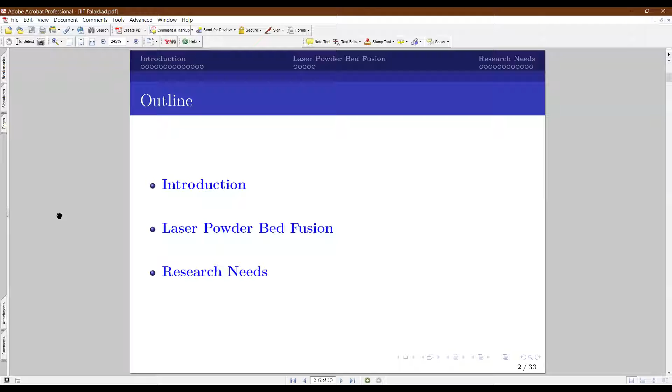In this presentation, I want to cover what is a commercially successful additive manufacturing process, that is laser powder bed fusion, how in the certification process we expect manufacturers to capture parameters, and what are the avenues for research for academicians. As a certification agency or development agency, we look for academicians to contribute in this area, either through PhD research or funding proposals, so that the data generated helps us establish this technology into several aerospace applications.

I think this is the last session. You've had a lot of technical sessions on metal additive manufacturing from different experts, and they've given great insight into the process, so I won't go deeper into that. I'll just slightly touch upon some important points in metal additive manufacturing, then directly cover the applications targeted in aerospace.

As we all know, the CAD drawing is the input to the 3D printing machine, which helps build the 3D printed part by progressively adding material layer by layer. A variety of energy sources are used: laser, electron beam, electric arc, of which laser and electron beam based machines are very popular. Particularly in the Indian additive manufacturing market, laser-based machines are more popular than electron beam machines. These high-energy laser sources are used to locally melt the metal powder in a protective atmosphere, otherwise it will lead to oxidation and other problems.

Along the path guided by your CAD model, you melt the metal and rapidly solidify it, repeating this step by building layer upon layer to evolve the three-dimensional component. Broadly, ASTM classifies this process into two categories: powder bed fusion, where powder is the raw material spread on the bed using a laser or electron beam to build the component, and another one is direct energy deposition, which uses slightly higher energy, using either wire or powder as feedstock.

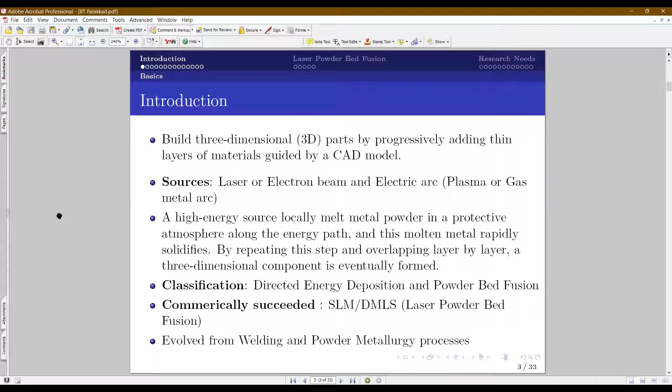Let's have some idea about what are airframes in a typical aircraft and helicopters, and what components we can target in 3D printing. So a typical aircraft airframe, we generally classify the structure into wing, fuselage, horizontal and vertical stabilizer, and landing gear.

Coming to the helicopter or chopper, we have a fuselage, and we call the backside the tail rotor system, and you have skid landing or wheel landing, and primary rotor systems.

If you look at the main rotor blade in the helicopter, it's made up of titanium with composites, and most of the bodies in the airframes are carbon fiber reinforced plastic or carbon glass fiber reinforced plastic. But the location wherever high critical stresses occur, and where loading or fatigue and tensile forces are high, metallic components are generally used, preferably aluminium.

Very rarely is magnesium used. Magnesium is widely used in the helicopter where vibration is high. Otherwise aluminium is more preferred because of the process complexity in manufacturing magnesium. Either the forming route is difficult, and the casting route also has its own challenge, like fire hazard. So aluminium rules the metal area in a typical airframe.

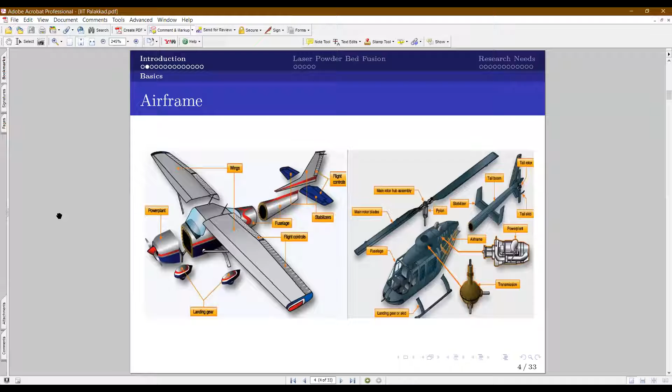Most elements inside the wing or fuselage have a lot of channels and structural elements. Those flanges, casings, all those things are the most potential components that can be 3D printed in coming days. Currently these are manufactured through some forming processes or directly machined from the feedstock.

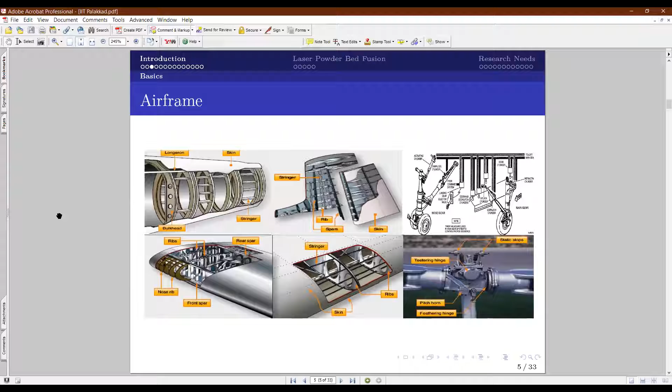Looking at the temperature and pressure inside a typical aero engine, when air enters maybe sub-zero temperature in the fan region, it's close to 100 degrees. Then when it enters the compressor, it will be in the order of 400 - with different stages of compressor, there's a progressive increase in temperature. In the combustion chamber, the temperature goes about 1500 to 2000, and the turbine entry temperature will be on the order of 1200. Then it goes out as exhaust.

So different operating conditions prevail in a typical engine. That's the reason the fan is generally made out of aluminum alloys, and the rear end of the fans is usually titanium, mainly titanium 6 aluminum 4 vanadium.

Then comes the compressor. From the first stage to close to the last stage, you typically find titanium alloys, either titanium 6 aluminum 4 vanadium or titanium 6-2-4-2. Both are alpha-beta alloys. And the rear end of the compressor, you will find some super alloys.

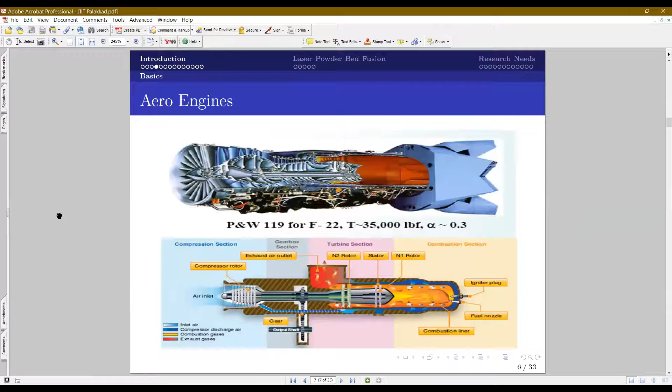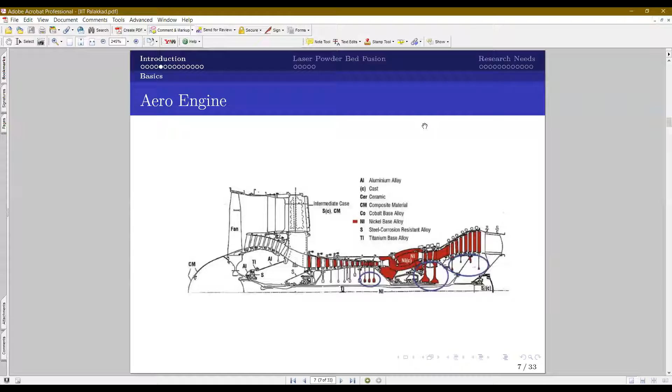So we will just look at some of the potential components which are very promising through 3D printing. Nozzle guide vane, it's a static part which has complex cooling channels and complex designs. The thickness is also very less. And this is a static part, and turbine blades are rotating parts. Again, you have cooling channels, and some of the turbine blades are single crystals or columnar grain structures. These columnar grain structures are easily attempted through 3D printing.

There are some studies from the US wherein they show that single crystal also is possible through 3D printing. Similarly, the turbine disc, a massive component with the integrated blades and disc, called blisk. So these components and the combustion chamber and fuel injection nozzle used in the combustion chamber, all of them have high shape complexity, and the requirements in terms of NDT or in terms of property requirements are very high, which can be easily realized through 3D printing.

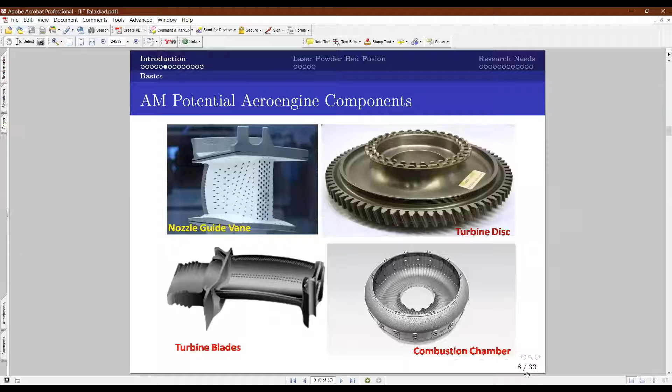And coming to the gear transmission components in the aerospace, especially a typical aircraft, you see that aircraft mounted accessory gearbox, which consists of about 10 to 15 oil lines running from one end to other end, about half-meter length.

Oil lines are running. Some of the oil lines are buried inside, like a blind oil path will be there. So these are presently manufactured through sand casting route because of the massive size and complexity. The yield is 15%, acceptance rate is very poor. That is, even with 10 components, if you make only one component that passes, it fails at some of the regions. One is either the dimension issue comes, or the oil passage issues, or defects at the oil passage junction. So these are the major reasons for the rejection of these gearbox casings.

Similarly, helicopter gearbox, which is also very complex shape, and wheel hub. So these components can be manufactured through 3D printing instead of the traditional process to reap the benefit of 3D printing.

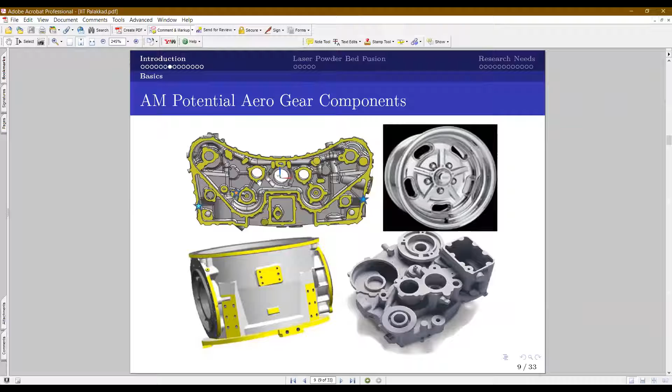And some of the sheet metal components, if you see, several components are assembled together and joined through secondary process like welding or brazing. So these components can easily be developed through 3D printing as an integral single component.

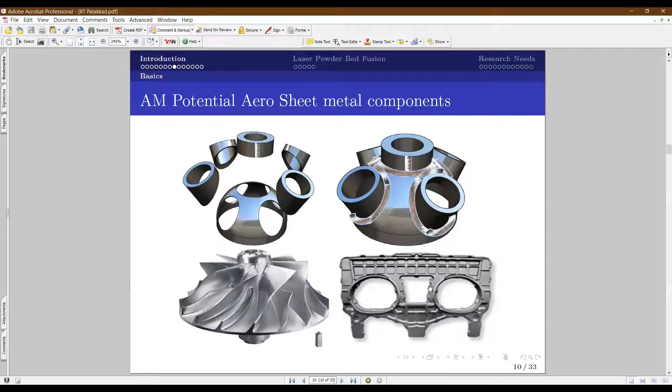And some of the components in the aircraft like impeller, which are directly machined from the bar stock due to the complexity of the shape. If you take these cases, 100 kg metal bar stock is taken and machined to get this impeller, which is 5 kg. So you can see 95 kg of material is wasted.

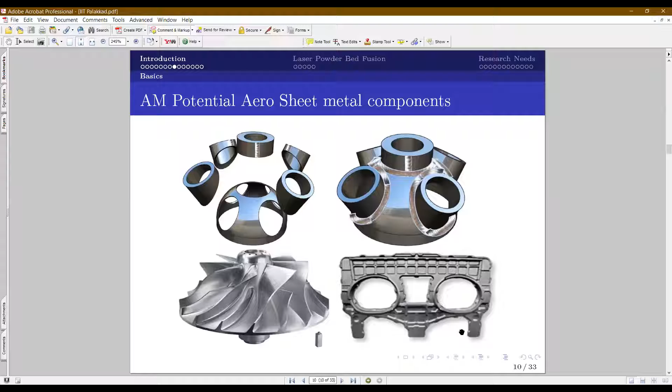So such a poor yield process can be replaced with 3D printing, as well as the complex shapes can be easily achieved through 3D printing. And the instrument panels, which are non-stress critical, and of course have a complex shape, so this can be easily made through our laser powder bed fusion kind of 3D printing process.

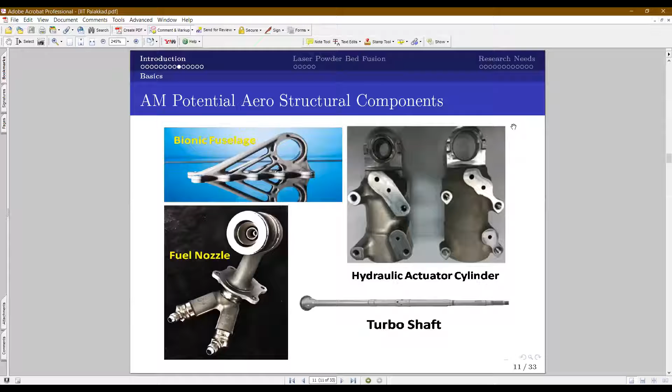And a few more: fuselage, bionic fuselage, fuel injector nozzle, which has the nozzle dimension in the order of micrometers, and some actuators, cylinders, and turbo shafts. These are the other potential components in the structural components in the aircraft, which can be fabricated through 3D printing.

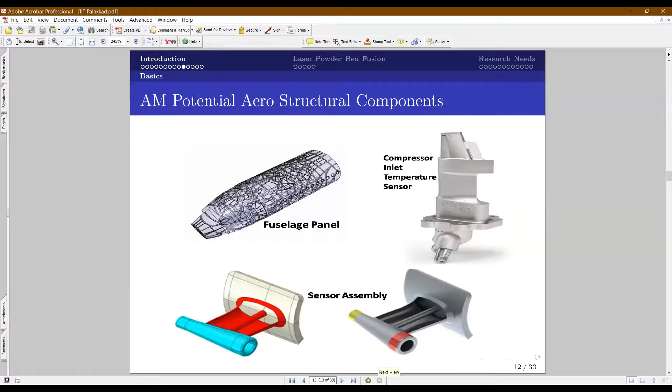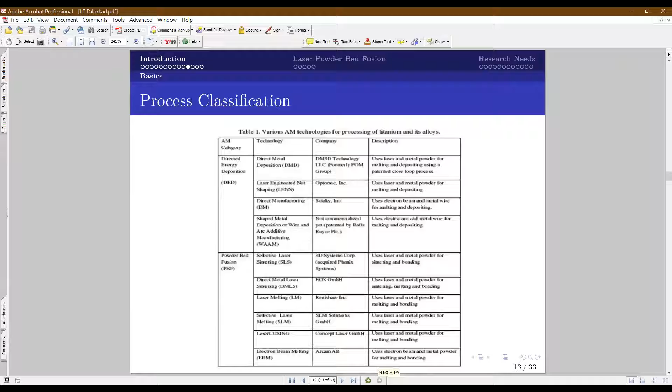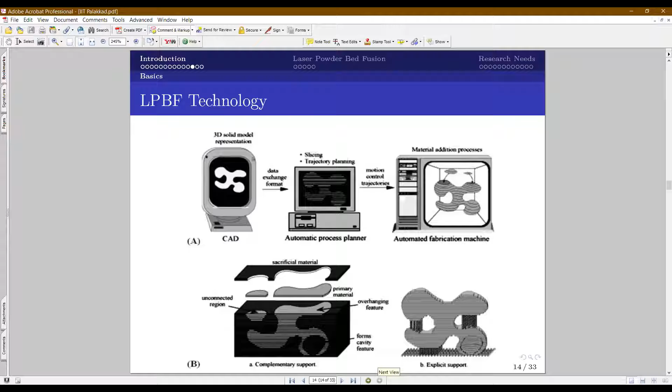You have a computer, make a CAD model, convert it to an STL file, then send it to the machine. The machine fabricates the parts depending on the part geometry. Supports are given, and supports are generally printed with weak properties so that they can be easily removed.

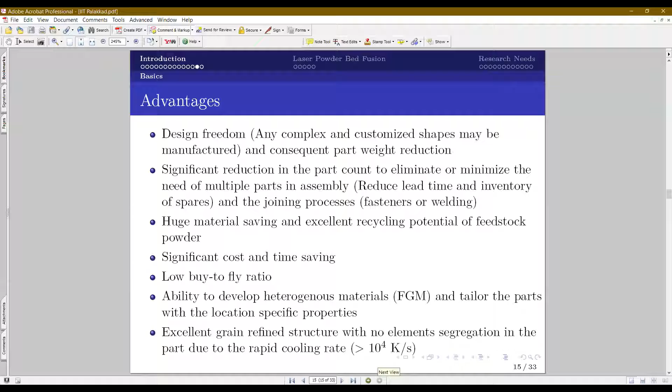Of course, any process comes with its own challenges. First and foremost challenge is anisotropy, properties varying with direction due to grain orientation. The second challenge is residual stresses because of the rapid heating and cooling. And there are unfamiliar defects, peculiar and specific to 3D printing, which are not experienced in conventional processes. So you don't have a standard or specification to help identify these defects, and there is no standardization for that.

Currently, machines cost about a few crores, 2 to 8 crores, so there is high capital investment. But the production rate or production volume given by one machine is comparatively lesser than traditional processes. Of course, this process is evolving in India, I see it picking up around 2017, and it's now in a rapid phase. It's growing, but still, if you look at material characterization, the state of material characterization is still immature.

Although it's a challenge, it is a boon for academic researchers, because they are the ones who will help develop data like microstructure and grains for different materials and new materials. For industry people, there are still challenges in standardization and specification.

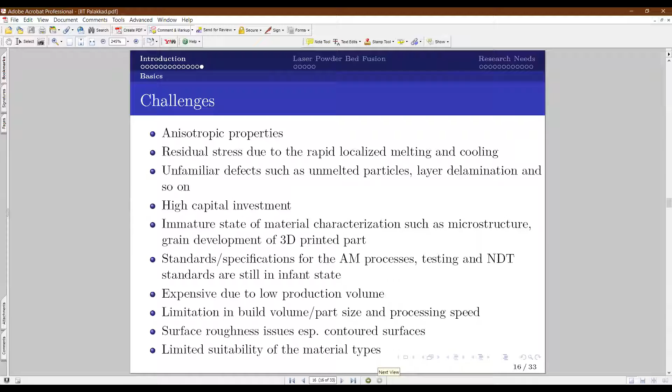Looking at it from a certification point of view, in India most of our aircraft fly with components processed by traditional methods using a different material grade. Let's say I take a beta titanium alloy, but I don't have a powder of that beta titanium alloy available to 3D print it.

So I have to map it with what I have in 3D printing. What we generally do is take a component, understand its original grade and tensile properties, and map it with the 3D printed grades. Chemistry most of the time doesn't match exactly, so we only use chemistry to confirm we're choosing a similar kind of material—titanium means titanium, aluminum means aluminum, steel means steel. For that reason only chemistry matching is needed.

Whereas tensile property plays a huge role, and I try to fit the tensile property. Most of the time we find that if strength is high, ductility is lower, or the other way around. So we try to map it and check that the variations are less than 5%. Only then do we accept it as an equivalent grade; otherwise we don't.

Next we look at three aspects of the functionality of the component: what is the load acting on it, what magnitude, and what is the temperature of exposure. What is the operating environment, especially regarding corrosion? So in the first phase, I identify a particular 3D printing equivalent grade.

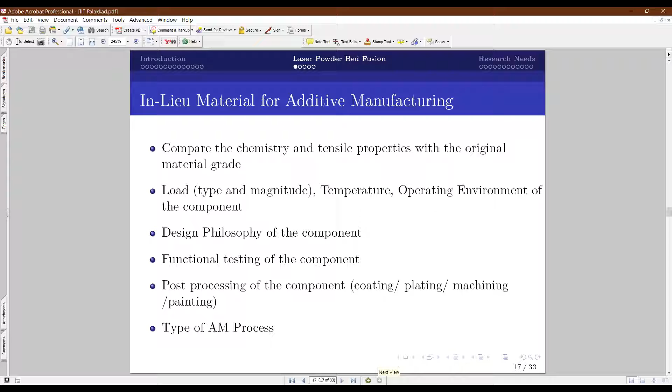Next, let's say I have frozen the 3D printing grade, like titanium 6 aluminum 4 vanadium. How do I ensure that the part is airworthy? I will start from the feedstock, that is the powder. These are the properties I will check and freeze. This is very important, because once I freeze it, I can ensure consistency in the next batches.

For example, size distribution, shape, surface texture, flow rate, apparent density, tap density, all the gaseous elements, powder chemistry with trace elements, and true density. The bracket shows what instrument is used to get these properties. We freeze each and every parameter, and unless each batch or each lot meets this frozen requirement, it is not allowed to be used to build a component.

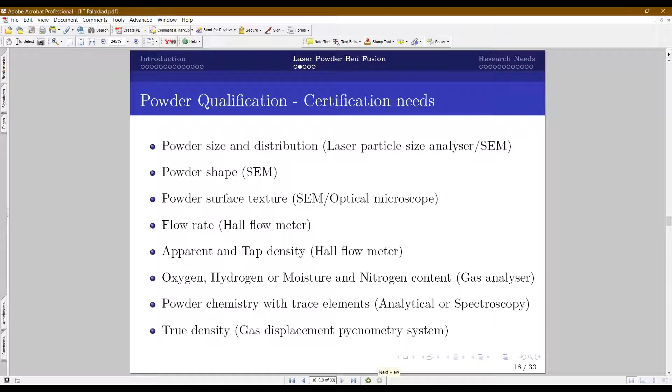Next comes the process - there are about 100 plus parameters. The major ones are: laser power, scanning speed, scanning strategy, build direction, build substrate temperature or powder temperature, layer thickness, hatch spacing, ambience used - whether nitrogen, argon or other - powder flow rate and moisture content. Then there are parameters about the recoater blades and other sensor based information.

We capture everything during the first development, and if the first development is successful, that will be frozen till the end. As long as we follow that, only then will the certification be awarded.

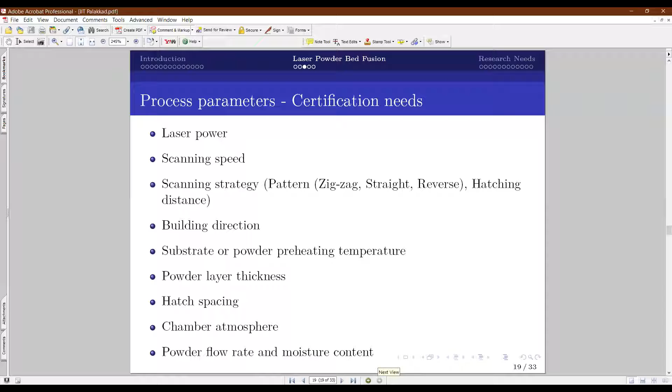Then the process document - we look at process parameter freezing, and there are other aspects too, like the process control document, which broadly covers what is the AM machine and its make. For example, if you build a component with the EOS machine, and tomorrow you switch to the SLM machine, then the entire thing will change.

Or different other processes like direct energy deposition. Similarly, the build strategy - how the build orientation is set, and the raw material source, where you buy the powder from - post processing, and during the build, whether there was any intentional stop or unintentional stop. All these things should be captured.

Then the way in which the build support structure is oriented, or the part is oriented with respect to the platform, should be captured, along with the machine serial number and build number, since different machines of the same brand or specification are used to print a part.

Then the operator who prints this material, their approval procedure, all the sensors, machines, laser system calibration status, all software and hardware updates to the machine - calibration is required if there's any change, like in the metal powder, or if it's not properly calibrated, as defined every 6 months. If they are not calibrated, they will be forced to do the calibration before being allowed to print.

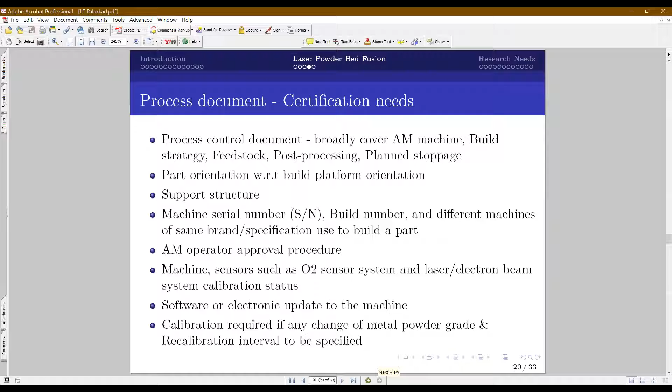Defects are the major challenge in 3D printing, and this is the area we give more emphasis to in certification. There are about 6 defects that are very prevalent in 3D printing, like porosities, hot cracking, unmelted particles, surface roughness, oxidation, and some balling.

We typically use X-ray CT scan for internal defects, eddy current testing for non-magnetic materials, fluorescent penetrant inspection, and magnetic particle inspection for surface defects.

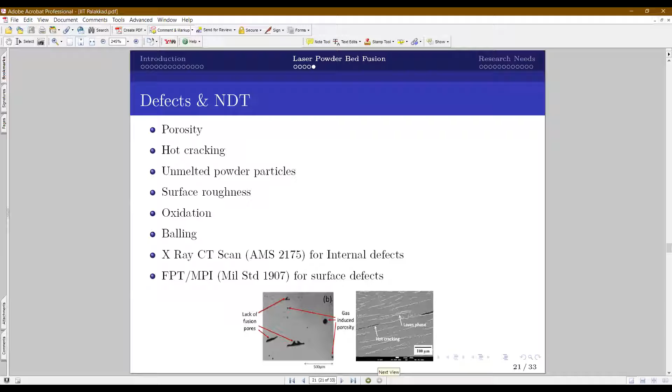So these are what I wanted to introduce. The next area is more of a discussion. I want to bring out my thought process to the academic community so that you can help us in this mission of establishing this process for our country.

I want to bring the idea of what material grades are currently available with companies, and which application or industry each is popular in.

If you look at aluminium alloys, 5 grades are very popular: aluminium 10SiMg, aluminium 12% silicon, and aluminium 7% silicon or A356. These aluminium-silicon alloys are cast alloys, easily printable, for which process parameters are already optimized.

Recently, a company called Elementum 3D has come up with an alloy called 2024 aluminium copper alloy with certain ceramic particles in it, so we can call it a metal matrix composite. RAM means reactive additive manufacturing - you have elemental particles, elemental powder with the metal, but during additive manufacturing, the reaction happens such that you find the particles forming in that.

Then there is an alloy called Scalmalloy, that is aluminium, magnesium, scandium. These are alloys for which 3D printing is easy and the process parameters are optimized.

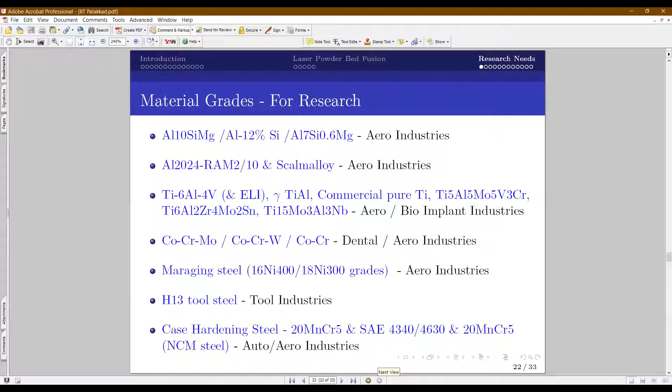In tool industries, people have recently introduced H13 tool steel powders, which is easily 3D printable. And low carbon, low alloy steels like 20MnCr5 and 4 series steels, that is nickel chromium moly steels, are very popular in the automobile and aero industries.

Then high alloy steels like 17-4 PH or 15-5 PH, or stainless steel 316L, 420 ferritic, and custom grade steels, for which powders exist, and people have printed components reliably which are used in aero and bio implants.

In aero engine turbine and combustion regions, mostly you find super alloys. About 5 super alloys in the Inconel area have powders available and can be 3D printed, like 718, 625, 713, 738, 939.

Nitinol, a popular shape memory alloy, has powders currently existing, and it is used in aircraft actuators and pipe couplings - so this is also 3D printable.

Recently researched, CM247 is one of the popular high temperature super alloys used in turbine regions. This powder is available and people have printed with it.

In cast alloys, again in aerospace and semiconductor industries, heat sink materials like copper-based tin bronze, aluminium bronze, or chromium bronze are very popular, and currently people have started printing these copper-based alloys too. In jewelry industries, all noble metals like gold, silver, platinum, palladium. Similarly, in imaging devices, tungsten is used, which is 3D printable currently and used in the medical industry.

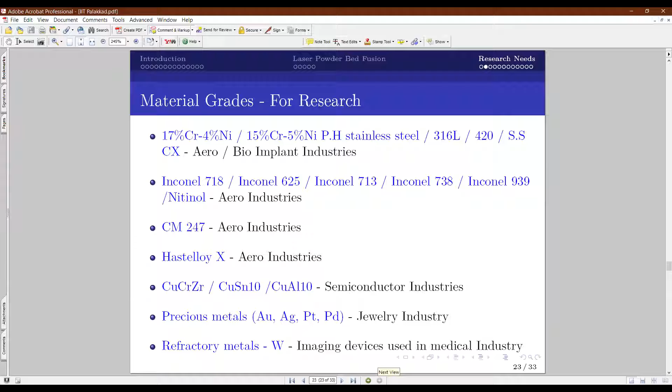Let's look at it from the designer's point of view - in which scenario aluminium alloys are chosen by the designer in aircraft. When a particular component of the system is not exposed beyond 120 degrees Celsius and the load coming on the component is less than 250, then the designer chooses aluminium alloy. I have given a couple of applications which I have shown you already - you can just read that out.

So what are the research areas you can work on? Aluminum alloys are difficult to print due to poor absorbability, high reflectivity, or scattering. So you can work on finding the best laser which can give better absorbability for the aluminum alloy. That is one very interesting problem.

Second is precipitation hardening. Aluminum alloys are strengthened with precipitation hardening. But 3D printed alloy is already in a quenched state. Do I need solution treatment again, or can I directly go for aging? There are some studies which show that T5 treatments are better than T6 treatments. So still a lot more can be done in the precipitation hardening heat treatment area for 3D printed aluminum alloys.

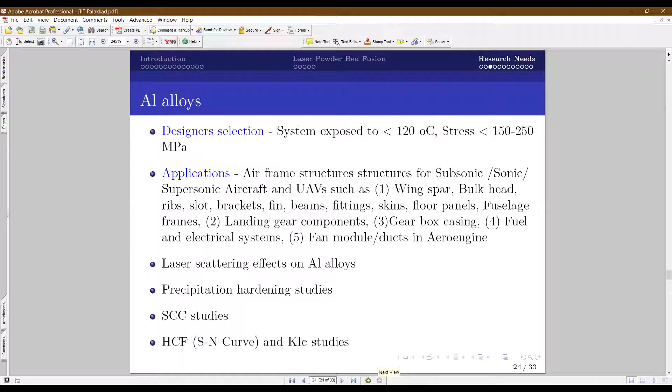Then pitting corrosion is another issue, and the schemes used to protect aluminum alloys like anodizing and chromatizing. These area studies are very much needed.

And developing nano grain structures is possible through 3D printing. There are some reports already available by some German researchers. So these are areas you can think of.

Currently aluminum alloys are used up to 120 degrees Celsius. By using Scalmalloy or RAM 10, it is proposed that aluminum alloy's working temperature can be improved or increased to 200 degrees Celsius. So you can channelize your work on how to identify the grade and heat treatment which can help use this material in a much higher temperature environment like 200 or 250.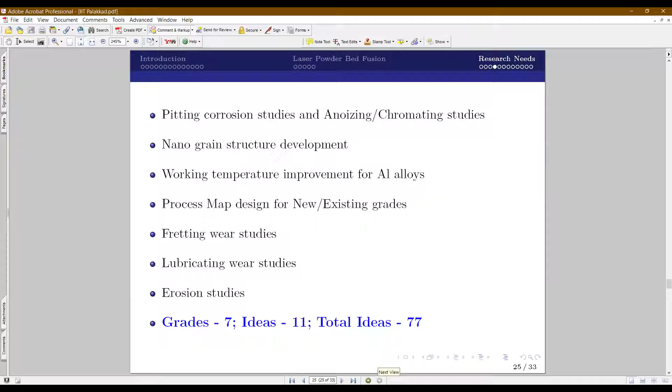Looking at the designer perspective, titanium alloys are chosen wherever the temperature doesn't exceed 500 degrees and stress level is less than 500 MPa. Similar applications like airframes in hypersonic aircraft, most engine compressor regions, pylons, and some missile parts where titanium is very much used.

Titanium by nature forms a texture during any forming process, and as we all know, forming a certain kind of texture can give either a texture hardening effect or a weakening effect. This process, by virtue of its nature, also forms texture and grain orientations. So understanding and developing texture understanding in 3D printed titanium alloys is of paramount importance.

Titanium alloys are strengthened, or their properties tweaked, through solution treatment and aging, which involves formation of different size, morphology, and fraction of alpha or beta phase or martensite phase. In the as-printed state, mostly we see martensite phases, and conventional solution treatment aging may not work for the 3D printed one. There is a lot of scope for researchers to understand heat treatment effects, mainly solution treatment, aging, or annealing treatments on 3D printed titanium alloys, and to tailor a specific heat treatment which gives the most optimized properties for the 3D printed material.

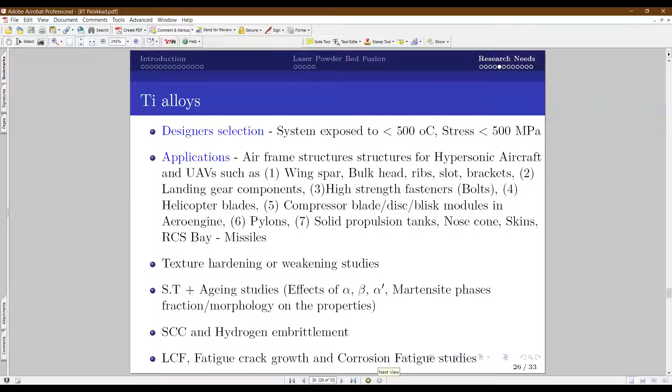Most titanium components in aero engines undergo low cycle fatigue. So studies on fatigue and fatigue crack growth or corrosion fatigue studies are very, very important. This data is currently not available, which puts a serious restriction on certification agencies or development agencies to select these alloys for fatigue critical applications.

As these alloys are used up to 500 degrees, creep and stress fracture behavior is very important, but data is not available. So I urge all academicians to focus their energy on developing this data.

Most aerospace components are complex in shape, and by virtue of the process, it is meant for complex shapes. So conventional smooth sample data may not be relevant for complex shapes. It is important to study notch effects, which mimic geometry effects on properties. Create notches with different stress concentrations and study their behavior in tensile or static mode and fatigue or dynamic modes.

Gather the data, which is very important because titanium alloys are notch sensitive in nature, and titanium alloys are prone to hot corrosion in different ambiences. Conventionally processed wrought grades have all the data for hot corrosion and oxidation, but for 3D printed alloys, it's still evolving. You can also work on process map studies.

And fretting wear studies, because your disc and blades are coupled by loose fit, those areas are prone to fretting, and titanium alloys in some regions are coated. So conventionally processed titanium components with conventional coating may or may not work with the 3D printed one. Those areas need attention and need to be explored.

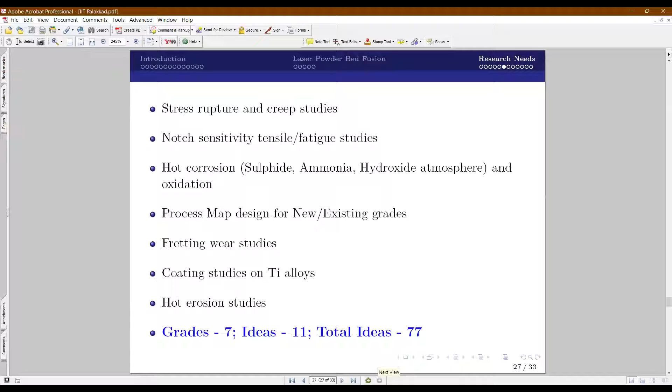And hot erosion studies - the compressor regions close to the combustion chamber are exposed to hot erosion, so studies on hot erosion also need to be done. These data are also very important for our industries, designers, or certification agencies. These ideas, whatever I've given, are very well welcomed by all project funding agencies because they want industry-relevant work.

Going to the next level, that is nickel or cobalt based superalloys. When the temperature is in the order of 1000 and stress at that temperature is less than 500, typically superalloys are used - like combustion chambers, turbines, casings, nuclear reactor components, missiles, heating elements in tool and die industries, like tools and dies in metal forming industries.

And to improve temperature performance, superalloys are generally coated with thermal barrier coating. In addition, they are made as single crystals, and cooling channels are also introduced. Whether the conventionally used TBC is applicable to 3D printed superalloys is still a subject of debate. So we can work on this area and develop a TBC for superalloys.

Similarly, these alloys are strengthened, or their creep strength or fatigue strength improved, by precipitation hardening treatment. We form several ordered precipitates like gamma prime, and several undesirable phases like topologically close-packed phases and Laves phases. The morphology and fraction of carbide or boride phases are very important. These differ between conventional processing and 3D printing, so understanding precipitation hardening treatment on 3D printed components is of paramount importance. I urge people to focus on heat treatment studies on these superalloys.

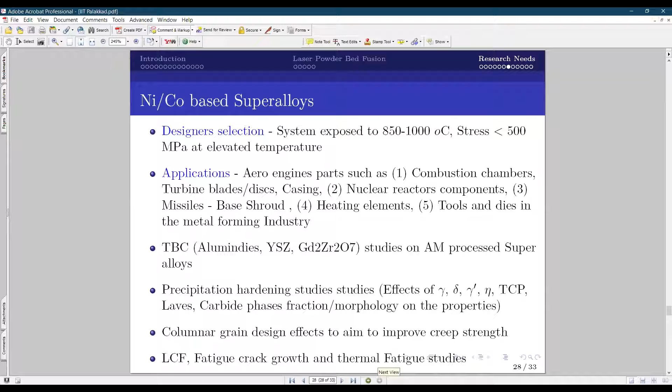There are some reports stating that columnar grain design is possible through 3D printing, which, if we achieve in India, would be a great achievement because it will help improve creep strength. Of course, low cycle fatigue, crack growth studies, and thermal fatigue are other areas we should importantly focus on for superalloys.

All high temperature properties like hot tensile, stress rupture, and creep studies data are very important in superalloys. And from the design perspective, how innovatively can I make the cooling channels to improve the efficiency of cooling in the hot end parts.

And hot corrosion studies, again like titanium alloys - oxidation studies, hot erosion studies, fretting - because one side is titanium and the other side is superalloy in the aero engine, so all of them are more or less the same. And process map design for existing and new grades - this is common for all the grades.

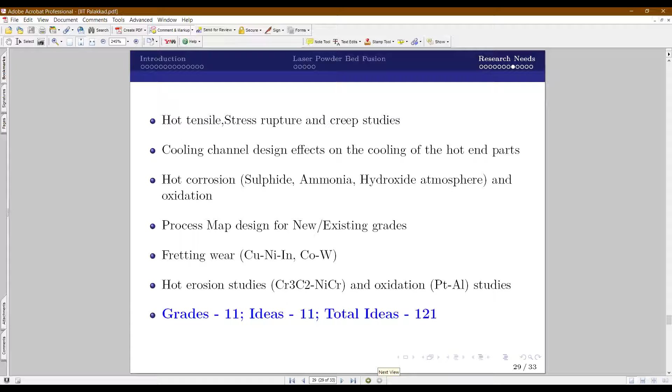Steels, although not so popular in aerospace, are still used in high-end aerospace applications. When the system is not exposed to more than 300 degrees, and stress levels are in the order of 500 to 1200 MPa, and if the environment is not so aggressive like a corrosive environment, then steels are generally chosen.

So most of the components you find in landing gear, high stress critical regions like slat tracks, door plugs, wheel axles, and so on. Also gearbox, transmission, high strength parts like PTO shafts, power take-off type shafts, actuator systems, and gear pinions.

Chemical processing industry mostly finds stainless steels. Surgical tools, stainless steels again. Tool and dies, where we find some high temperature resistant steels, and high-end automobile parts.

So one area which we can think of studying is quenching and tempering, because in this process itself you get the quenched 3D printed component. Whether we need to do quenching once again, or how about its tempering effects? All those regions we can touch upon and understand the different phases formation by different heat treatments in the steels.

And all the gear, landing gear parts are subjected to both low cycle and high cycle fatigue. So getting the fatigue data on these alloys is very, very important. Here you have to fix the material, fix the heat treatment, have a clear understanding about the phases, then conduct the property characterization. Otherwise the data will have a huge scattering.

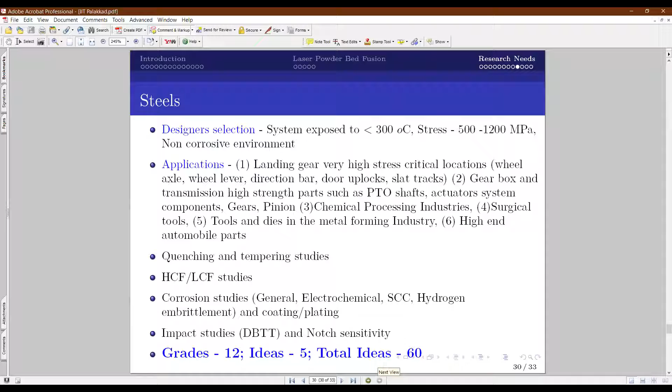So till now we have seen the material specific aspects. Now let's look at the process specific aspects - what things we can understand and write proposals or studies on.

One is the powder. As you know, spherical particles are needed for laser based powder bed fusion, because of the flow rate requirements and the packing density requirements. Similarly, the particle size also should be in the range of 15 to 60 micron meter as defined by different companies. So understanding powder size distribution and shape effects on the properties and defect formation in the component is important.

There are some talks wherein they say even water atomized powder can be used to get similar properties as achieved by spherical particles. So this area is still a gray area. There is no complete understanding on this. So I urge people to study powder effects or powder property effects on the final component property and defects.

And similarly, inert gas. Presently, we find most components are printed under the ambience of argon. How about nitrogen, which is less expensive? I expect similar efficacy with nitrogen. So how about its impact on the properties and defects? There are some studies saying nitrogen is much better than argon in steels, but still there is no clarity. It may be the case that nitrogen may be more akin to some grades and argon may be more close to some grades. So we need to understand this inert gas effect on properties and defects.

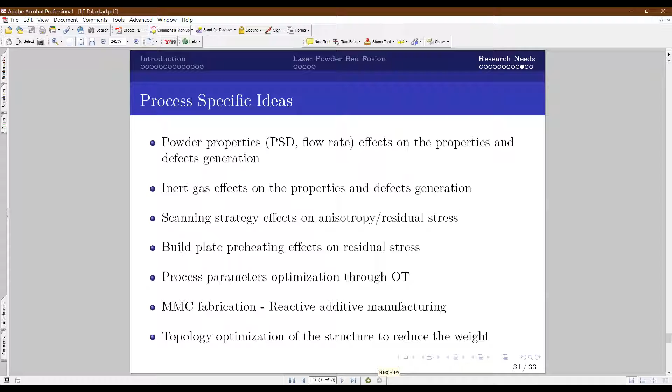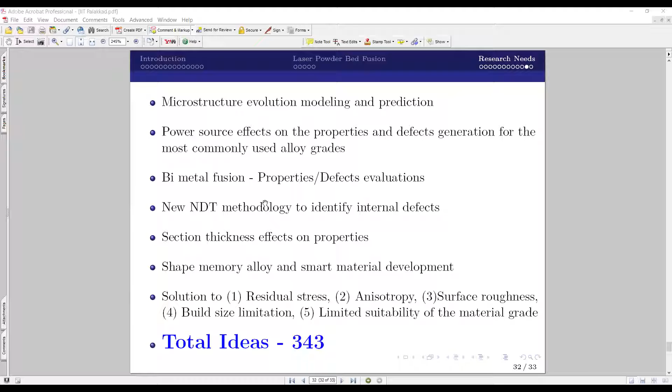I think I've spent about an hour. With this, I just want to conclude my presentation and open the forum for discussion. So any questions, please ask me. Whatever I know, I'll be happy to share with you.

I also share my email ID and phone number, so any doubts after the talk, you can still be in touch with me. And I once again thank Dr. Kanmani and Dr. Keshavan for the opportunity. This forum really gave me a chance to express my thoughts, especially to share what I need from academicians. Thank you so much, sir.

Thank you, Dr. Ram Prabhu. Thanks for enlightening us, particularly on what area we're supposed to work on in additive manufacturing. I think your talk did great justice, especially as the last session of this workshop. You started from the basics and slowly moved on.

Thank you, sir. Any questions? People can drop them in the chat box also, I'll read and answer. Am I audible, sir? Hello, Dr. Ram Prabhu, am I audible?

Dr. Subbu, you are audible to me. Ram Prabhu sir, am I audible? Hello, Ram Prabhu sir, are you able to listen to us? Are you able to hear us, sir? Kesavan, can you call him? I'm just texting him. Yeah, fine, good. Just a minute, sir, my audio system is just setting up. Yeah, okay, please.